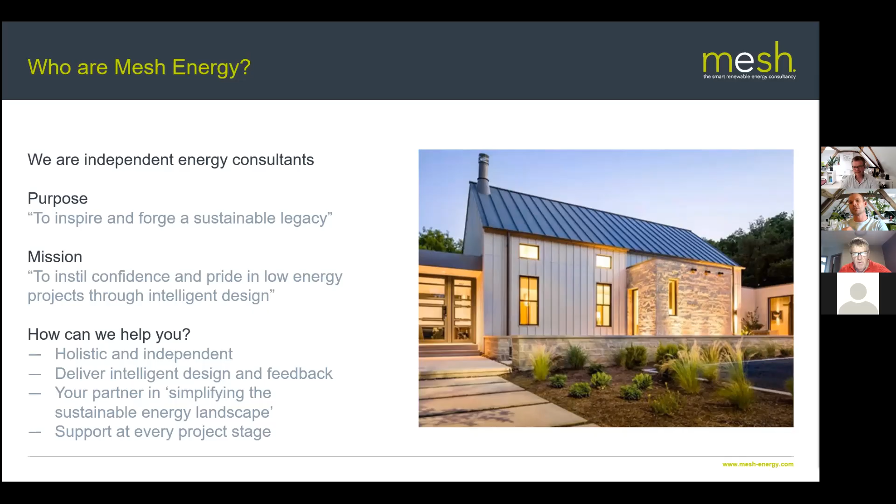Thanks, Doug. So today's CPD, what I'm planning to do is put the plan into context, and I'll be as brief as possible on the importance of the plan, and give a high-level summary of the policy areas. But my focus will be on what many of you are familiar with as Chapter 5, which is sustainable design and construction. After all that, hopefully there will be time for Q&A, because there's an awful lot to get through.

So the London Plan is just over 10 years old. It was first issued the year after Building Regs 2010, with the aim of making London zero carbon by 2050, and to incorporate the legacy of the London Olympics.

The 2011 edition is more concerned with the 3 pillars of sustainability. Then the plan was updated in 2016, the year after COP21 established the Paris Agreement of 2015. This was followed by amendments in 2017, at which point there was a significant shift in scope and areas of concern, establishing the current format of the plan today.

The 2021 edition incorporates just over 1,500 changes, with the continued aim of making London zero carbon by 2050, and is very comprehensive in its scope.

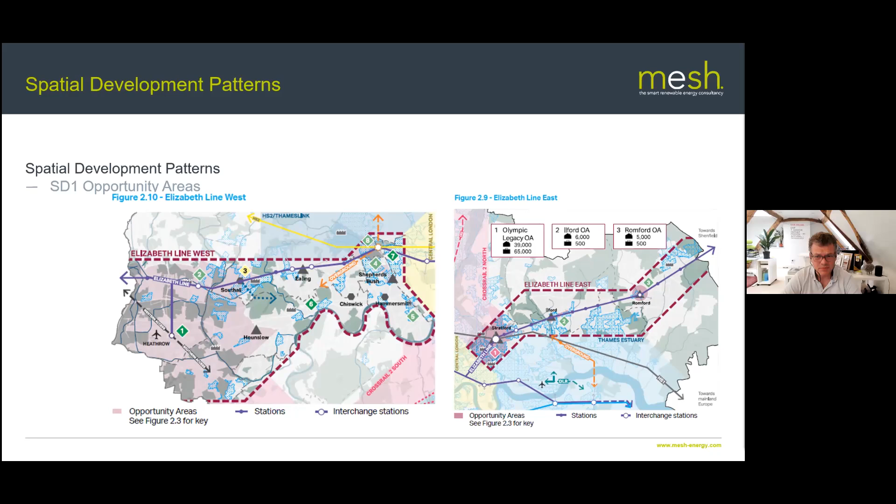And the numbers are big. For example, the Elizabeth line: 125,000 homes and 170,000 employment opportunities. When you look at Crossrail 2 North and Crossrail 2 South, there's another 44,000 homes, 32,000 employment opportunities. These plans cover the Bakerloo Line and Thameslink, looking at around 100,000 homes and 100,000 employment opportunities.

And then there's the Thames Estuary and the Trams Triangle between Croydon and Wimbledon. This is about 146,000 homes, 129,000 jobs. There's a lot of expansion.

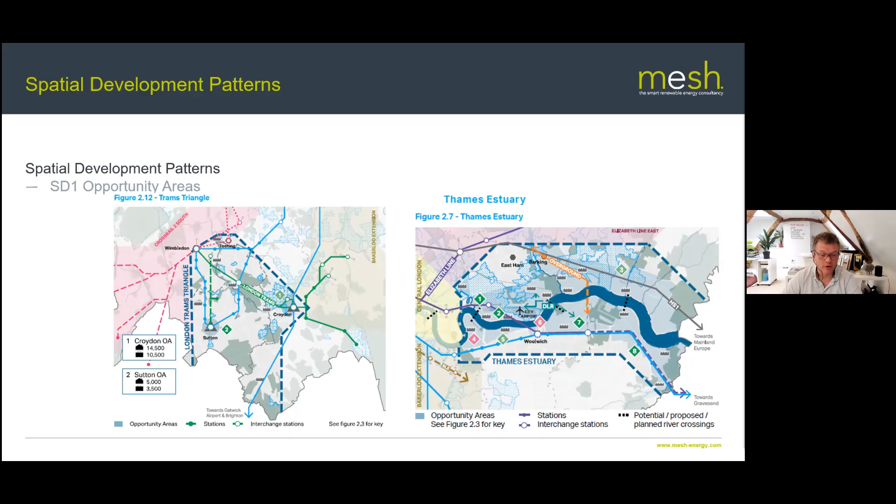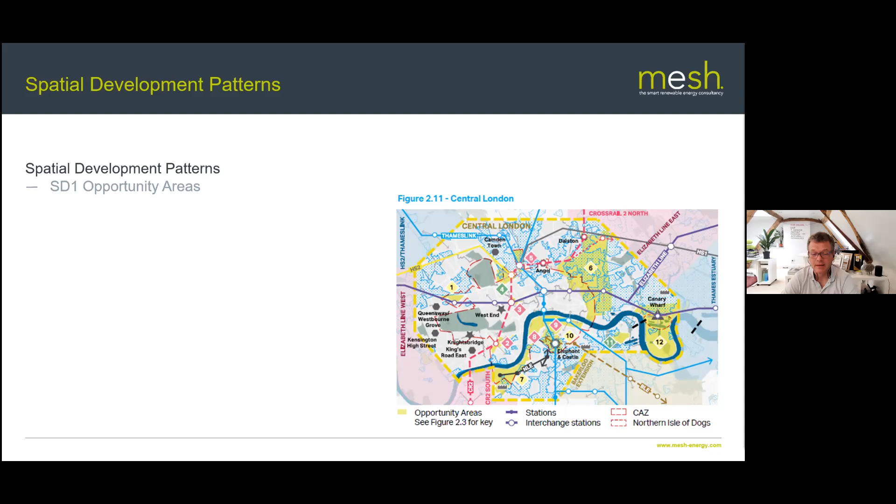And then there's the Central Activities Zone, which we're most familiar with probably as the West End, Canary Wharf, the City. Here they're allocating 85,000 homes and probably about a third employment opportunities. By my rough estimate, this equates to about 3.7 million square meters of housing and 4.5 million square meters of office space. So if anyone on the webinar today is aware of current market cost and value rates, it'd be good to let Doug know the value of this growth in the chat box by the end of the meeting, by the end of the CPD.

Now, of course, this all impacts on the surrounding area. So London really is now becoming a 100-mile city. The plan calls for collaboration with the surrounding local authorities. There's 130 across the region.

And this is really a result of the Localism Act of 2011. The reason for this is because the South East is home to about a third of the UK population and is expected to grow by up to 20% over the next couple of decades, with house numbers increasing by a third.

The CAZ is seen as a distinct area in its own right, because it's a national and international destination for business, tourism, education, but it also has that same relationship when it comes to arts, culture, entertainment and its heritage. Because of this, the plan stipulates that the activity zone air quality should always be improved by every project that goes in. So it basically requires projects to take an air quality positive approach, which we'll come to later.

The plan's also mindful of the fact that the CAZ sits at the centre of a town centre network. London is traditionally seen as a conglomerate of villages. It encourages a town centre first approach so that they're sustainable, healthy and walkable, and their intensification requires impact assessments to be undertaken as the role of town centres changes.

Now, the plan expects town centre development to enhance vitality and viability while complementing the wider southeast. So it's not to be seen as in competition. Strategic and local regeneration through local plans should involve town centre management, business, trade associations, neighbourhood forums, although one might go further and include health and education organisations in that discussion these days.

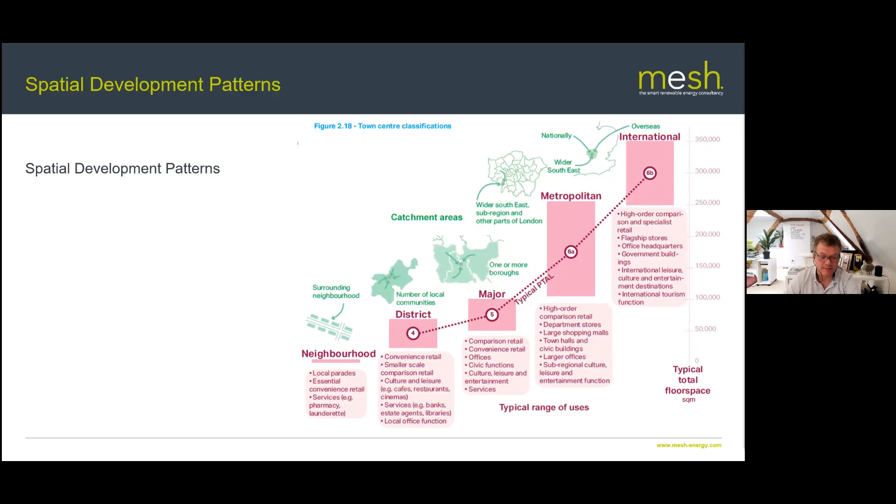And so strategic and local regeneration through local plans is quite extensive, so the stakeholder engagement becomes wider. Design section - I'm not going to dwell on design too long, although it's the linchpin in bringing all this together and materialising it in the built environment.

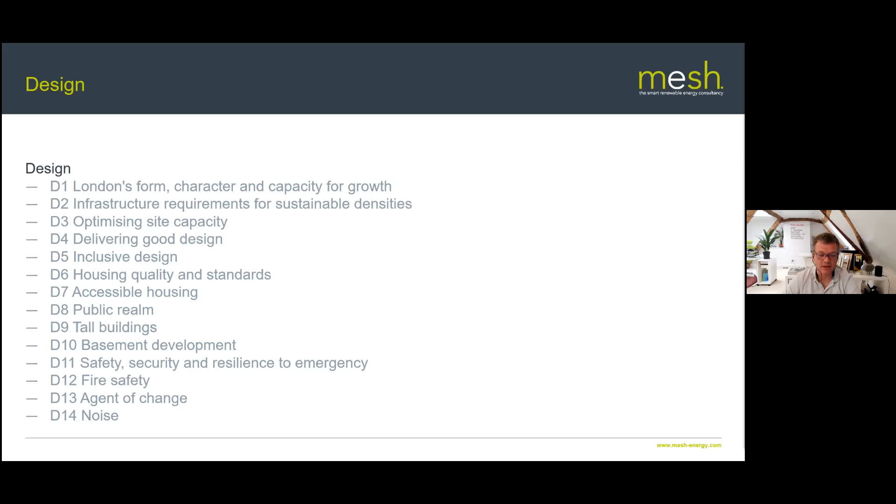Policy D1 is concerned with building typologies, urban form, structure of travel networks, blue and green infrastructure, noise, historic evolution, and especially the views across London. The plan expects this to be supported through the local plan. So the key here is that you almost have like the national planning policy framework, then the London plan, and then the local borough plans.

And so there's this sort of hierarchy of strategic responsibility, if you like. And so what this means is that they're aiming to deliver good growth through good design.

Policy D2 really requires that we design for future densities set out in local plans, keeping with the local character.

But policy D3 I find particularly interesting as this requires a design-led approach in considering the form and layout, experience and quality and character of a development. So the plan is looking for more than how something looks or works, but also asks that we make this the best it can be through meaningful engagement and collaboration throughout the stakeholder network.

And so the circular economy now sits alongside urban greening, inclusive spaces, and designing out crime, because these all become fundamental concerns.

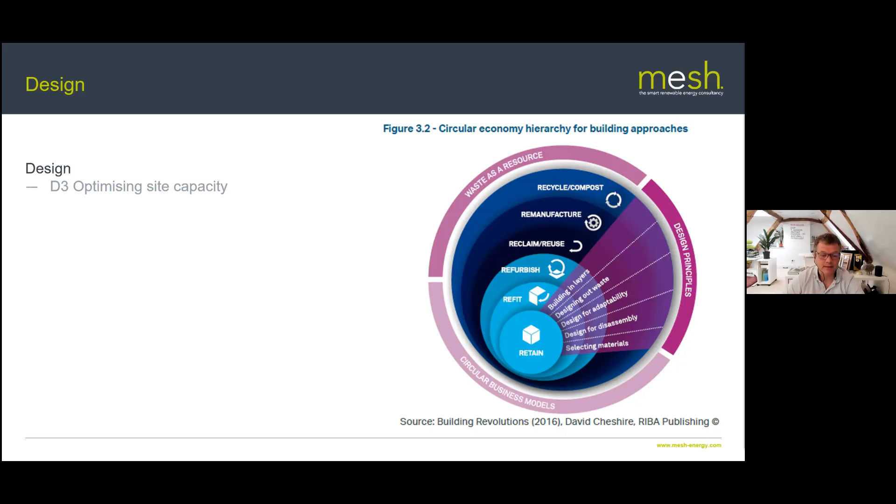The delivery of good design suggests the submission of master plans and design codes supported by design and access statements that provide the maximum amount of appropriate detail at each stage. The aim of this is to ensure that design quality is upheld throughout the project delivery process and avoids amendments at a later date.

So there's a lot more focus on early engagement, robust concept design. And so this really encourages the whole design team to be involved in the development from the start to the finish. So that through analysis and development certainty, design scrutiny and quality, digital simulation, and technical evidence is maintained throughout.

Policies D5 to D7 mean that there are no barriers to social inclusion and interaction, as the Mayor sees inclusive design as indivisible from good design. And so there are minimum types of private residence internal floor area ranging from around 40 to 140 metres squared for a 1 to 6 bedroom house, and a minimum amount of outdoor space, of which 10% has to be accessible.

And the design has to provide dual aspect for improved daylight, views out, natural ventilation, flexible use, while reducing discomfort from noise pollution. Development plans also need to encourage and explore opportunities to create new public realm where appropriate and make a positive contribution without being too intrusive.

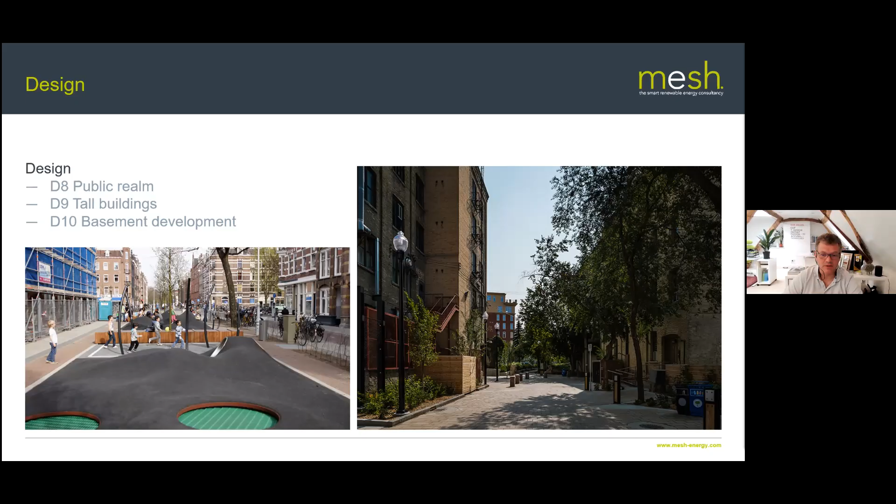As we've already heard, public health is addressed through the plan through good growth and the spatial development patterns, but it also features in the economy, sustainable infrastructure and transport sections. It's further reinforced through policy D11 to 14 for obvious reasons, but D11 is really concerned with fire, flood, weather, crime and terrorism.

Policy D12, I think, these days is self-evident and is concerned with appliance access, evacuation and methods of construction. D13 and 14 are interrelated in that the impact of existing and new noise and nuisance generating activities are to be mitigated to improve the local health and quality of life.

Now, housing is quite a comprehensive section. The increase in housing supply is set out as 10-year targets in local development plans that must be met. This equates to about 40,000 homes per year on larger sites. And small sites of less than about 2,500 metres squared need to deliver 12,000 new homes per year. And these sites are really encouraged to mainly fall within PTAL 3 to 6 zones for sustainable transport strategies.

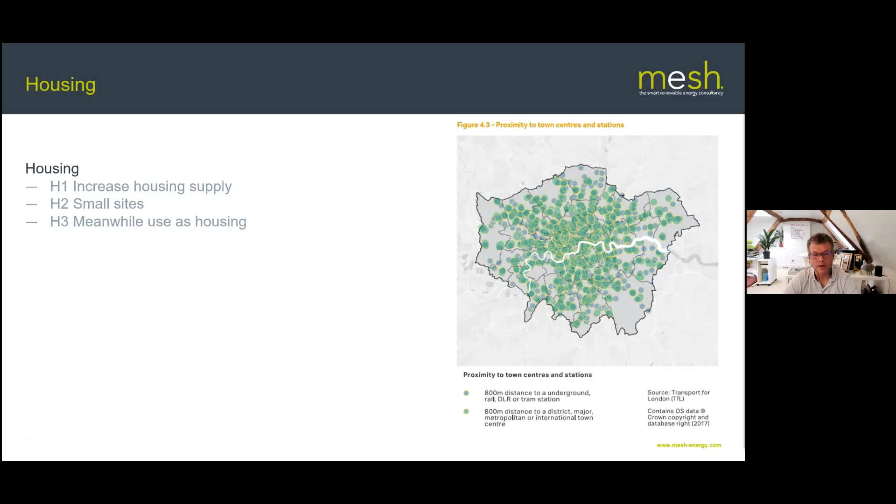Alternatively, they also need to be within 800 metres of a station or town centre, and these are expected to play an important role in achieving these growth rates. And so boroughs are to identify opportunities for the meanwhile use of sites for housing as well, to make use of land while awaiting longer term development.

When it comes to affordability, simply put, 50% of new homes in London are to be affordable, and the plan does define affordable. It says affordable housing is socially rented, affordable rented and intermediate housing provided to eligible households whose needs are not met by the market. And eligibility is determined with regard to local incomes and local house prices.

Now, when it comes to major development proposals, affordable housing needs to make up 35% of development, or if the development falls on public sector land or strategic industrial locations, then it needs to be 50% affordable. However, there is a fast track for mixed tenure developments, but in that case, affordable housing needs to be 75% of the development.

So affordable housing is seen as 30% low cost rented. There's 30% which will be intermediate products for generally affordable. And then affordable is defined as households with a 60 to 90,000 pound income per annum. And the remaining 40% is determined by the borough, who publish monitoring information annually on this.

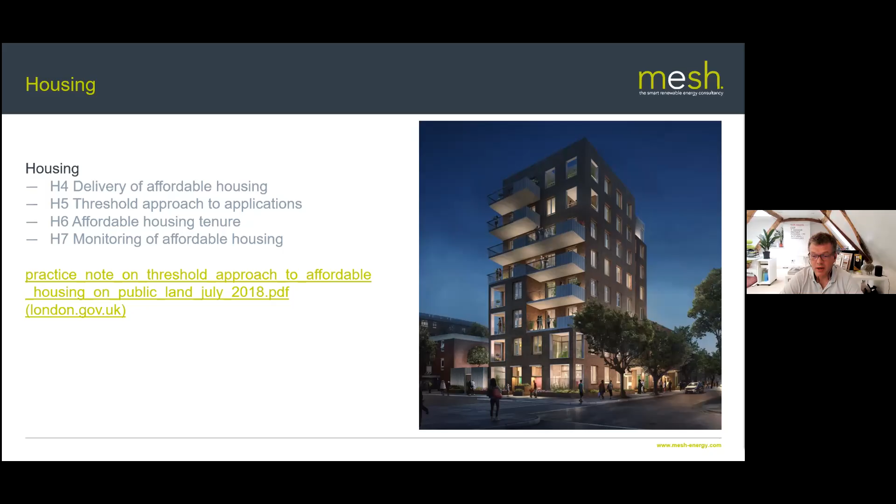The loss of existing housing needs to be replaced by new housing, at existing or higher densities, with at least the equivalent or greater overall floor space. But demolition needs to be considered as a last resort and has to be viability tested as part of the design process. And then policy H9 stipulates that boroughs should promote efficient use of existing housing stock to reduce the number of vacant or under-occupied dwellings, particularly in the buy-to-leave market.

The range of mixed and inclusive housing need and demand must meet that identified in the 2017 Strategic Housing Market Assessment. And this has to be backed up by robust evidence as well. Now, policy H11 surrounding build to rent requires that schemes need to be of at least 50 self-contained units. And these are held under covenant for at least 15 years with tenancies of at least 3 years. And they must have service charge certainty and be supported by the likes of on-site management for a recognised ombudsman scheme.

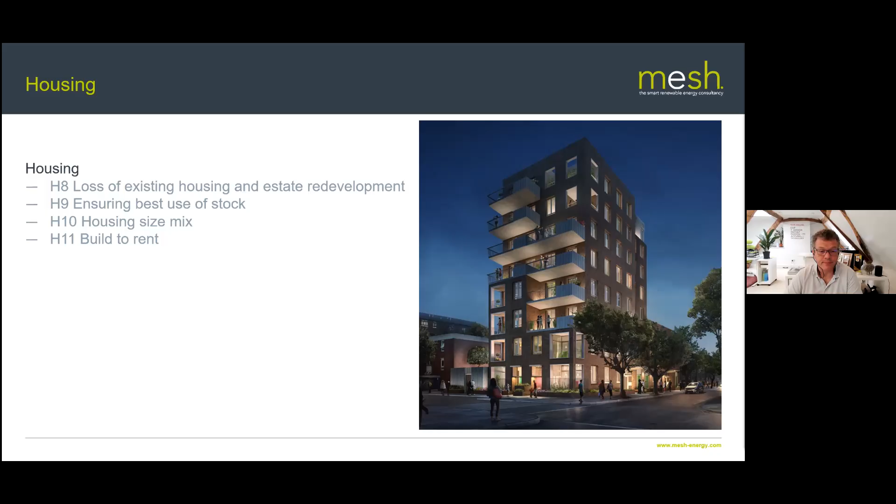Policy H15 is to ensure the local and strategic need for student accommodation is addressed. And to follow the fast track route, 35% should be affordable student accommodation, and that increases to 50% on public land. Large-scale purpose-built shared living must contribute towards mixed and inclusive communities. And it has to have well-connected sustainable transport with communal facilities, on-site management, and must support a tenure of at least 3 months minimum.

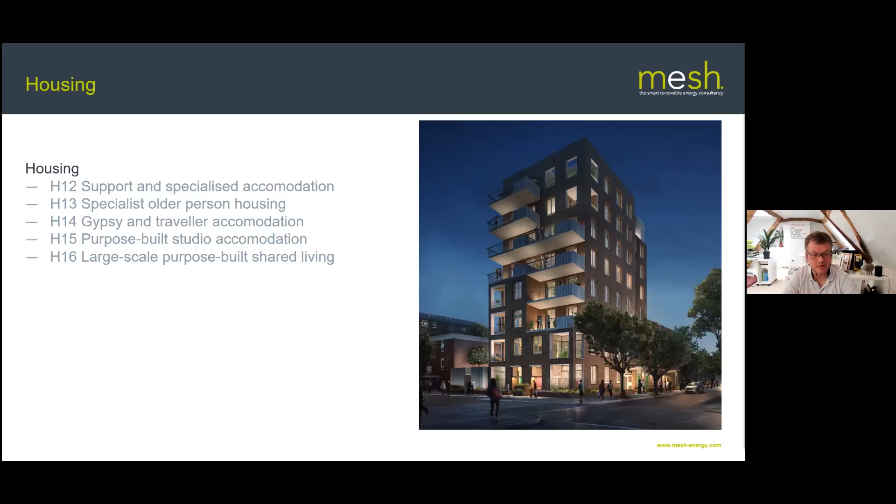Social infrastructure, I won't dwell on it too long. It's concerned more with public realm that has sustainable transport links. It is identified and addressed through opportunity area planning frameworks, area action plans, development infrastructure funding studies and neighbourhood plans. But what it does look for is repurposing redundant infrastructure as other forms of social infrastructure. For example, you might have read about the Hackney School of Food recently in the architectural press, which is quite a delightful little project, really.

But at the same time, the NHS, education, SEN, childcare, youth groups, sport clubs, criminal justice, emergency facilities are now all stakeholders in providing accessible amenities now and in the future. And policy S5 calls for secure sites justified by needs assessments, and it's there to maintain, promote and enhance networks for walking, cycling and other activities such as the Walk London network.

It's also looking for publicly accessible conveniences and changing places that support people with profound and multiple learning disabilities or motor neuron disease, multiple sclerosis, as well as older people. And also boroughs are encouraged to support each other in sufficient provision of appropriate burial space, both within and outside their boroughs. So they're encouraged to collaborate a lot more on that.

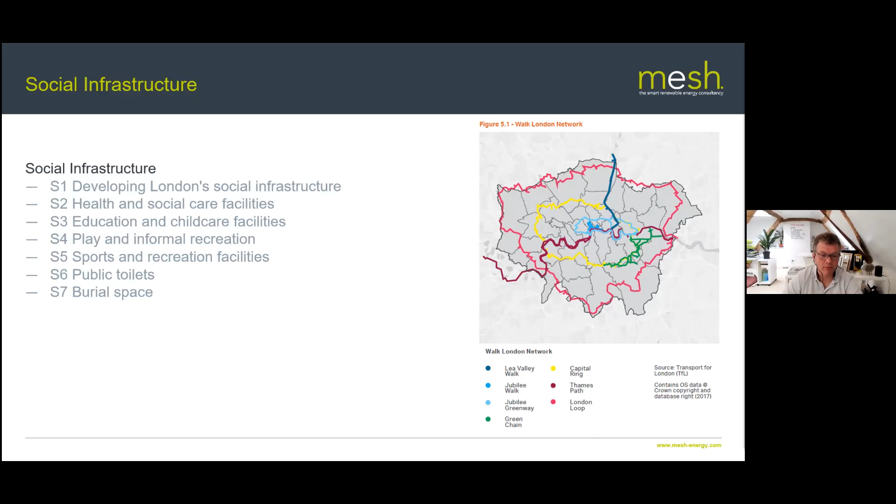With regard to London's economy, the CAZ is anticipating almost 60% employment growth in the next 20 years. They'll be anticipating 18% growth in inner London and 23% in outer London, which represents roughly 4.7 to 6.1 million square meters of office space. But all these aspirations require intensification. And so the provision of suitable business spaces to meet this demand is to be set out in local plans, but it also needs to provide for charities, voluntary and community organisations, social enterprise, creative performance and makerspace, and also disadvantaged startups.

Land use is to adopt a strategic approach through local plans that services logistics, materials, utilities, sustainable transport functions, wholesale markets, emerging industries, enterprise and R&D. While office space really needs to be flexible, scalable, support scientific and creative industries, and be affordable within defined circumstances as well.

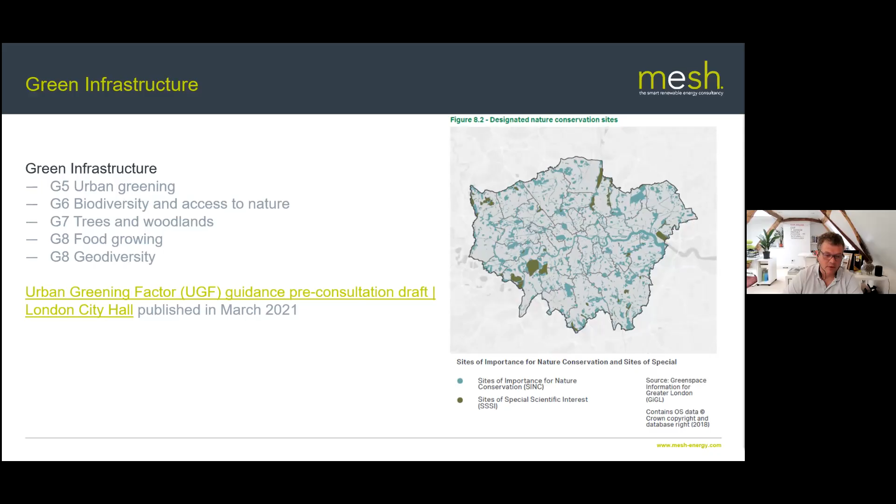So what this means is, in essence, major development proposals must incorporate measures such as high quality landscaping, including trees, green roofs, green walls, and nature-based sustainable drainage as well. And so in relation to this, the plan protects sites of importance for nature conservation, as well as existing urban forest and woodland. And this should be reinforced through local development plan and local borough policy.

Geodiversity actually is a fundamental cornerstone of our everyday lives. Geology obviously affects where we build, how we construct buildings, and how we deliver associated services. It might affect the size and scale of a ground source heat pump collector array, for example. And it influences the design and layout of infrastructure, filters the drinking water, and fundamentally underpins the landscape around us. And so regionally important geological sites are protected through local plans, as they also enhance biodiversity.

Now, sustainable infrastructure. This policy is expansive, so I'll aim to focus on the important changes. It's best summed up as the provision of accountable, evidence-based design that seeks to close the performance gap. So design is about performance and not compliance. And when we say the performance gap, everybody is aware of the S-curve relationship between, say, a Part L calculation of a project in design compared with post-occupancy evaluation studies, and you're looking at usually a fourfold difference between what's anticipated and what is actually happening.

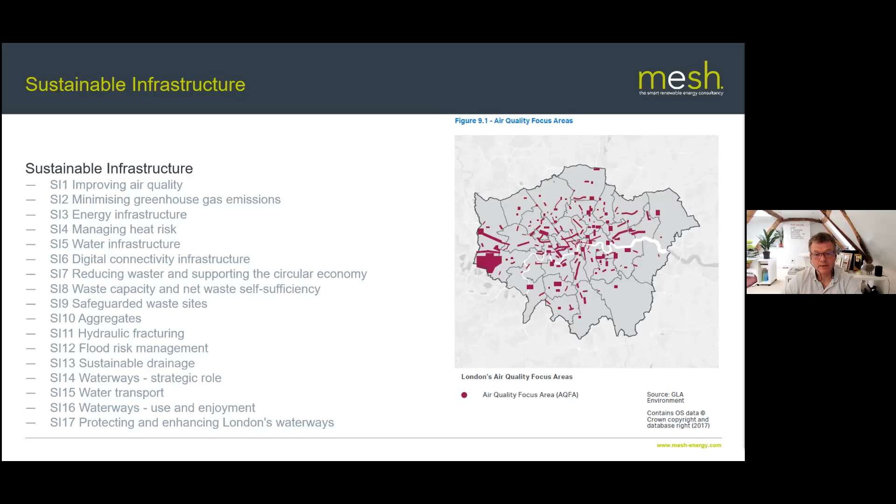Contextual data, for example, must anticipate and update be seen reporting throughout the RIBA plan of work, including planning, while building energy use and renewable energy use must do the same, but also report in post-occupancy as well. Energy storage, such as batteries, must report on capacity, but also the net flow to EV charging. And with regard to the plant, the building services, a breakdown of anticipated fuel use, energy system energy losses, and the import or export of heating and cooling from district heat networks must also report, as well as energy in use. And then finally, carbon emissions, shortfalls and offsetting are to be anticipated and reported on as well.

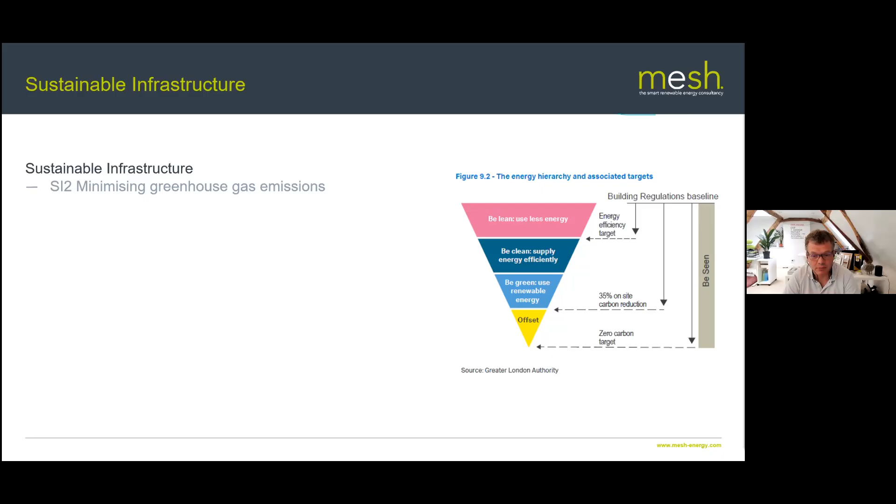And also we see the first significant introduction in the plan of whole life carbon assessments. So whole life carbon assessments really do what they say on the tin. They're concerned with the embodied carbon contained in the extraction, processing, and assembly of materials on site.

In addition, this includes the carbon arising from operations, whether it be potable water use, energy use displaced by renewable technology, end-of-life replacement cycles of plant, and maintenance and upkeep of the building. And then finally, the deconstruction of the building, which may lead to reuse, recycling, or downcycling of the assets or part thereof.

But also projects are required to calculate operational energy as set out in RIBA 2030 Climate Challenge. Version 2 has just been released. And this is aligned with the London Energy Transformation Initiative, GLA, UK GBC, and the Institution of Structural Engineers, and is essentially landing that 2050 trajectory.

So the plan suggests really that BREEAM be used as a point of reference to demonstrate that energy efficiency targets have been met, and that we can expect to see BREEAM targets included in borough local plans. The plan also calls for dynamic overheating modelling. And so it'll be a requirement to carry out CIBSE TM59 residential overheating analysis or TM52 non-domestic overheating analysis.

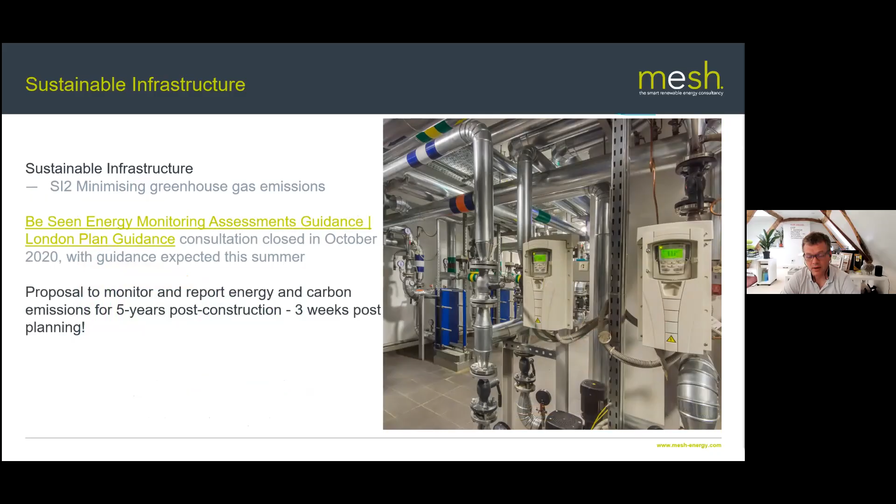The proposal for Be Seen reporting must be completed 3 weeks post-planning, and that must set out a 5-year post-construction monitoring programme. The energy assessment guidance still applies, but it now includes a carbon emissions reporting spreadsheet, available through the London Plan website. As well as there's carbon offset fund guidance from 2018, but that's mainly aimed at local authorities and sets out how carbon offset funds may actually be spent.

The plan energy infrastructure policy requires the development of energy master plans that involve the boroughs, developers, as well as the energy companies. And this is to identify existing and required upgrades for energy centres, such as the one at the Olympic Park, as well as energy storage and additional infrastructure.

Major developments with proposals within heat network priority areas should have communal low temperature heating systems that are zero emission or secondary sources, or at least have ultra low NOx gas boilers. And there's plenty of good guidance on this in the CIBSE CP1 heat networks code of practice for heat supply in urban environments.

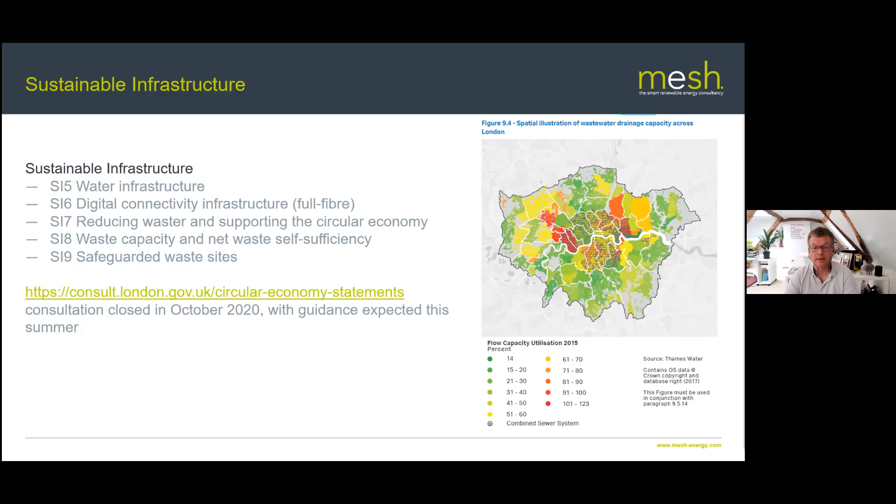To be brief, aggregates need to be recycled wherever possible, with developments to make provision for the maintenance of a land bank, which is effectively 7 years supply of aggregate raw material of at least 5 million tonnes up to 2041. Fracking is to be refused. The policy is a little bit longer than that in print, but that's effectively it.

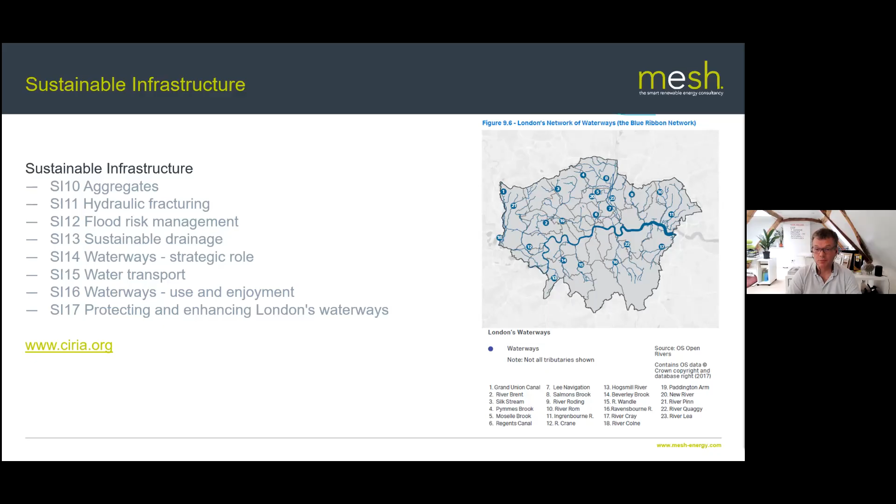And for policies SI12 and SI13, CIRIA is a great source on sustainable water management design when you're looking at SUDs and so on and so forth. Well, SI14 to SI15 and really 16 and 17 as well sets out policies surrounding London waterways as multifunctional assets that require the boroughs to establish joint area-based strategies.

The plan recognises the shortage of long and short stay moorings, and so it's looking for the maintenance and restoration of the Thames Path and towpaths as sustainable transport corridors. And so that enables engagement with blue infrastructure for cultural and leisure purposes, as well as being an educational resource.

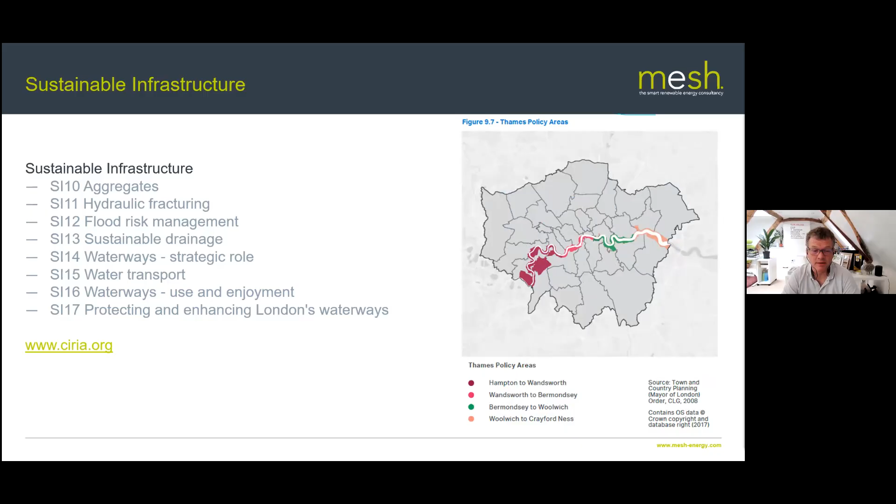When it comes to transport, it's anticipated, and it's quite noticeable if you only go to London once in a blue moon, that there will be a citywide shift from 63% to 80% of journeys being made by walking, cycling, and public transport. And so the plan recognises that streets need to become more healthy. And so in the wider context, transport connections with the southeast and at a national level are already undergoing expansion.

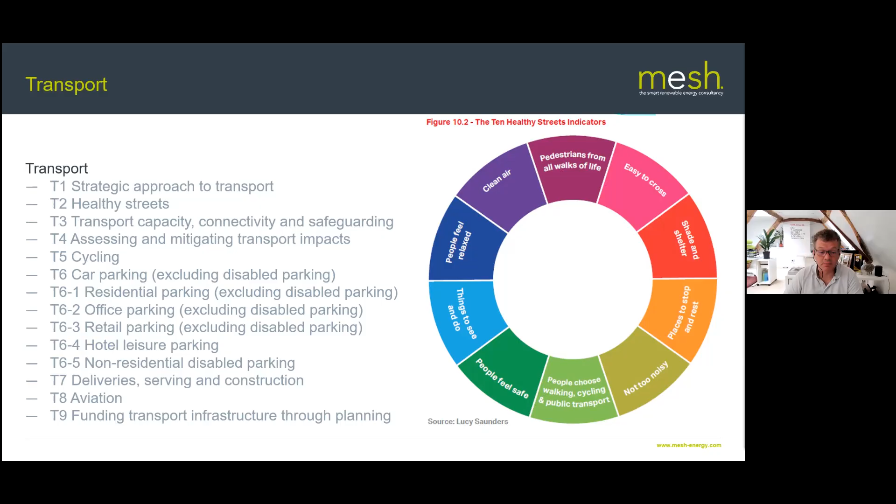And so development plans and development decisions to ensure the provision of sufficient and suitably located land for the development of the current and expanded public and active transport system to serve London's need. And so as a result, the Healthy Streets Initiative and active travel approach sets out indicative transport schemes in the plan running from 2017 through to 2041 for all the boroughs in London to improve capacity, connectivity, and quality.

What this means is the GLA require a transport infrastructure impact assessment that embeds the Healthy Streets approach within the vicinity of a new development. And this needs to include travel plans, parking design, management plans, construction logistics and delivery, as well as servicing plans of the development post-completion. And all this has to be done with regard to the Transport for London guidance so that it contributes positively to the intent and aspirations of the plan.

Car-free should be the starting point for all development proposals if they're within the higher PTAL zones, and EV infrastructure is to be provided without affecting pedestrianisation. While residential parking spaces are according to PTAL levels, and whether the development is situated in outer or inner London, these typically range between 1.5 to 0.75 spaces per unit.

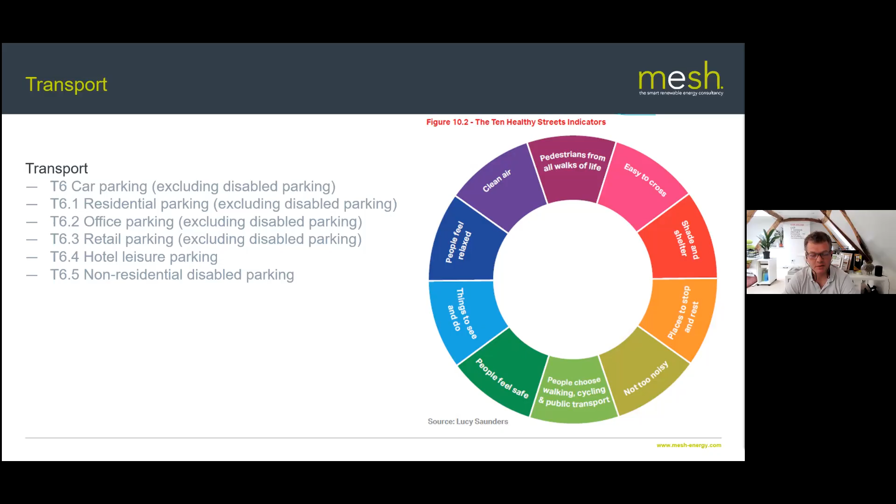In essence, policy T7 is calling for safe, sustainable, considered just-in-time freight movements that are set out in project logistics planning. While aviation policy, in its simplest form, is primarily concerned with what is best for London. So the plan requires the environmental, health and infrastructure impacts across and through London of aviation projects are fully understood. They need to be assessed and demonstrate that there's no other alternative, and that the project will actually fund the additional access infrastructure required, typically through the mayoral community infrastructure levy.